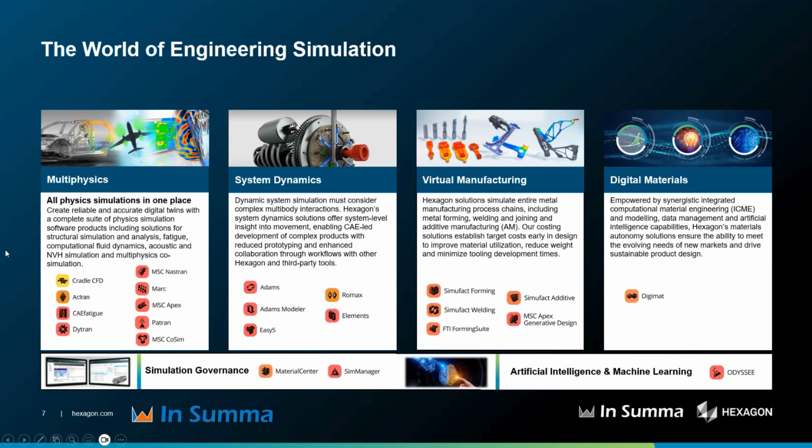As I mentioned, today we'll mainly focus on artificial intelligence and machine learning using ODYSSEE itself, but we'll still try to couple it with different kinds of simulation software. In this case, we'll look at Cradle CFD, and also from the system dynamics perspective, Adams.

So just to dive into the nitty-gritty, some of you have heard about this before, I assume, but some of you haven't. But what is ODYSSEE technically?

ODYSSEE is basically a tool specifically designed for engineers, mainly to help them in the design of experiment activities and also during their optimization activities. This is, of course, very broad - it can mean anything. The idea behind ODYSSEE is that it is very versatile and can be used in multiple engineering disciplines, not necessarily discipline bonded, but usable in whichever application you have.

Predictive techniques are utilized in ODYSSEE. What I mean by that is the machine learning algorithms use data sets to enable quick and easy data manipulation in order to obtain, for example, a new response for your design, or a new optimized case you are looking at. Hereby, engineers especially can avoid costly manual labor - if there is work where large amounts of data has to be generated, which takes a lot of time because you have to constantly change the parameters yourself, ODYSSEE can help do that automatically.

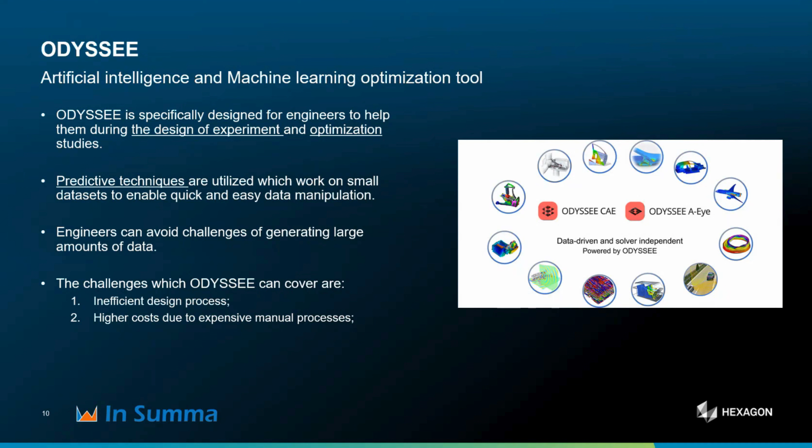First of all, we have ODYSSEE CAE. ODYSSEE CAE is basically a tool used for real-time predictions for a certain design space, so for design of experiments. This can, for example, help in multiple scenarios, which we will see later in the demonstration, whereby we have multiple variables which are somehow connected together, but still there's an optimization or an optimal setting to be found. Therefore, it can also be used for robustness studies, sensitivity analysis, and, for example, reliability analysis as well.

On another note, we have ODYSSEE A-Eye. ODYSSEE A-Eye is more focused technically on image-based prediction. So let's say if I have a data set of pictures and I know from those pictures what is wrong and what is right, I can import it into my learning database, and every new picture is predicted based on your learning database. But this is not only bonded to pictures - you can also use different CAD geometries, but also sound. The actual benefit of this is that it is very tailor-made, so you can create your own customized setup for that specific case you are working on.

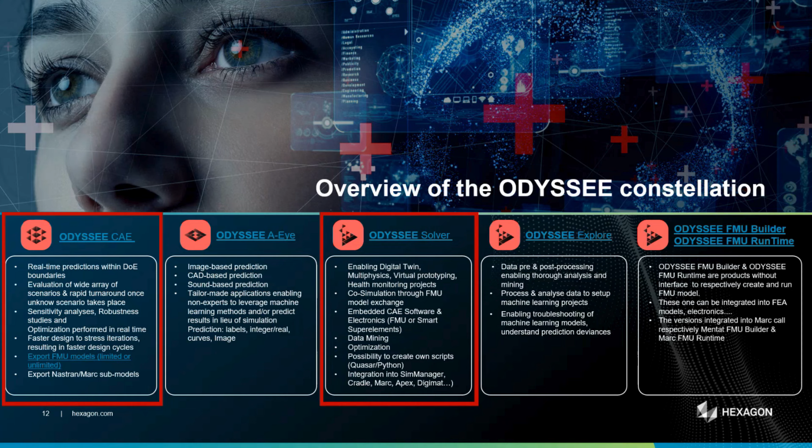In today's webinar, as you can see, this is quite broad, and we could go on all day talking about what can do what, showcasing a lot of case studies around it. But I would like to focus mainly on two particular applications: ODYSSEE CAE and ODYSSEE Solver. We are going to use ODYSSEE CAE for the Adams and ODYSSEE demonstration, and we're going to use ODYSSEE Solver, integrated into Cradle CFD, to tackle the problem that we then encounter.

In terms of reduced order modeling, which will be discussed later, some of you might have heard of this, some might not. On a brief introductory note, reduced order modeling, in its simplest form, starts from high fidelity complex mathematical models.

What that means is if I have a very complex model with a couple hundred degrees of freedom, and I want to use it for real-time applications, which is one of the benefits of reduced order models, I want to decrease the degrees of freedom such that the accuracy is still maintained, so it can represent the main trend line of my response. This is very advantageous, especially for real-time simulation, where you need a direct response from your model. It also makes it very usable for dynamic responses and dynamic analysis.

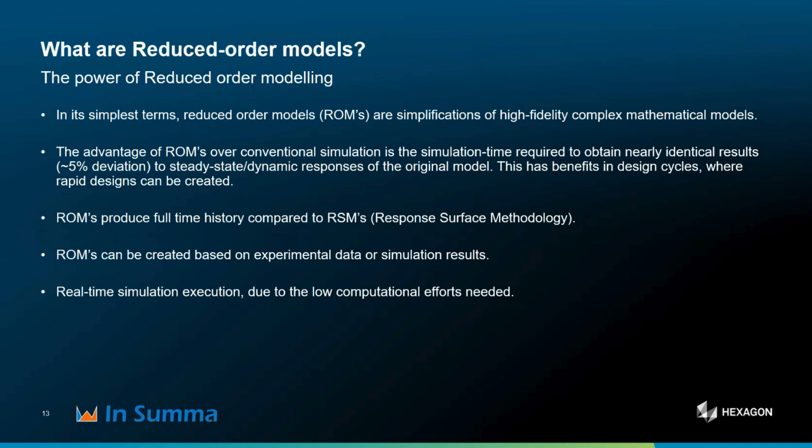Another advantage is that you can create this reduced order model based on either experimental results or simulation results. And because we have this reduced amount of degrees of freedom, there isn't a lot of computational effort needed.

If we compare it to a finite element simulation, a general engineering simulation, we see that reduced order models are data-driven rather than partial differential equation driven. If you have a finite element model, you have a stiffness matrix and a partial differential equation for each element. However, with a reduced order model, we basically have a certain amount of data points that we know.

So we have an X as our input, and a Y as our output. I have a data set, and what I want to do is predict the unknown. That's the whole idea - we predict the unknown in the shortest possible time, so we can be efficient with our work.

The power of ODYSSEE comes here, where we can use any kind of data set regardless of the source - it can be sound, a CAD model, or a response curve, which we'll see later. This helps create a relatively accurate model, within approximately 5% of your simulation results, while still managing to represent the accuracy - done in a fraction of the time.

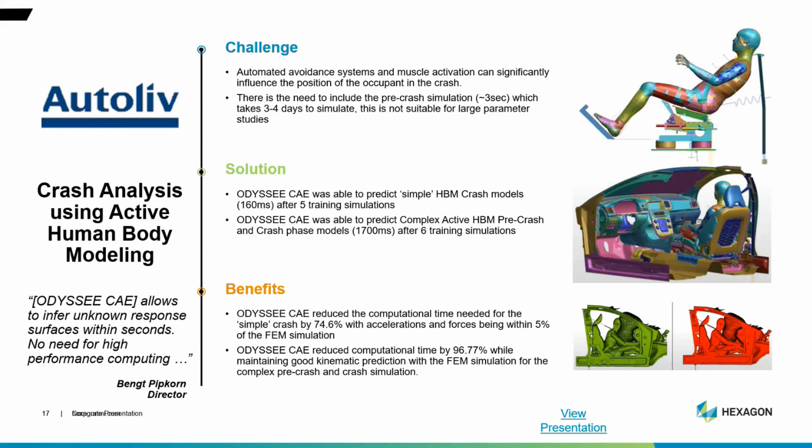So in terms of case studies, I want to provide 3 case studies for the audience today. And the first one, what I would like to focus on is a crash simulation from Autoliv. So the idea behind this is that they would like to predict different design specifications for their seat, and they need to do 2 different simulations. So one of them is a pre-crash simulation, which takes approximately 3 to 4 days to simulate if everything goes right, of course. And this is very, very time consuming.

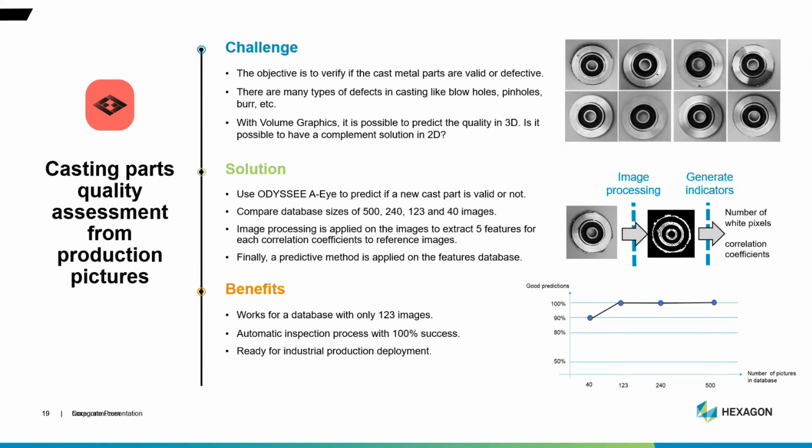Finally, this case study is from ODYSSEE A-Eye. The case study we have seen before is from ODYSSEE CAE. This is specifically from ODYSSEE A-Eye. And ODYSSEE A-Eye, as I mentioned before, is more an image-based prediction tool. So you can use, of course, different inputs such as sound, CAD models, and images as well. And the idea was basically here, if you have a manufacturing process, let's say, in this case, the manufacturing of brake discs, we can see on the top right that there are several pictures which show that the actual part itself is badly manufactured. So there's a manufacturing deficiency in the parts.

So the idea is basically that if I have a certain data set of pictures, in this case, the pictures of the brake caliper of the brake discs, we can then use that to learn via ODYSSEE A-Eye, basically to train a model, whereby we can then assign, okay, this brake disc is right, and the other one is wrong. And by that, you will be able to basically predict with every single new picture from your design process, or from your manufacturing process in this case, does it have a manufacturing deficiency or not?

But please note that you can always go all out, and you can always use a lot of pictures to train your database, but it's not always needed. As an engineer, especially from a CFD perspective, you can compare this to a mesh convergence study, let's say, whereby after some time, if I refine my mesh, the actual accuracy won't necessarily be higher, but my computational effort will still increase.

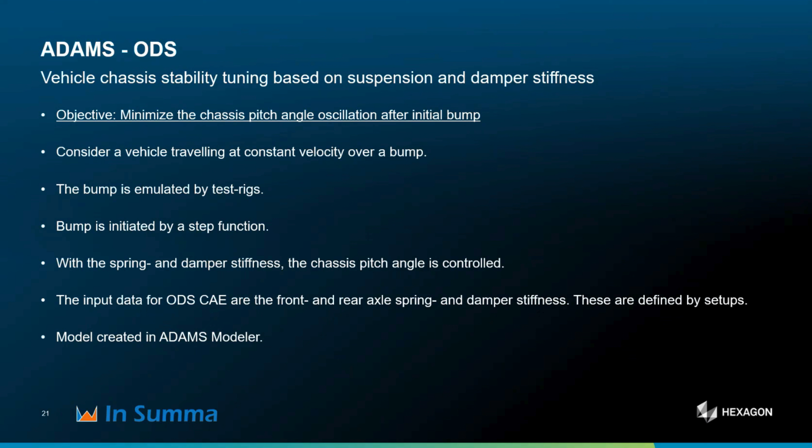So in this case, what we want to do is minimize the chassis pitch after an initial bump, because the idea is that we consider a vehicle traveling at a constant velocity, and it goes over a bump. This bump has been emulated by a test rig, which has been created in Adams Modeler, and the bump itself is induced as a step function.

But as I mentioned before, in order to fine-tune the chassis pitch, we need to use some kind of input, right? So the input in this case will be the front and rear spring and damper stiffness, and we will consider this as the axle stiffness. So what does that mean? That for the front axle, we have a certain amount of spring stiffness for one wheel. And that will then be changed in the Adams model itself.

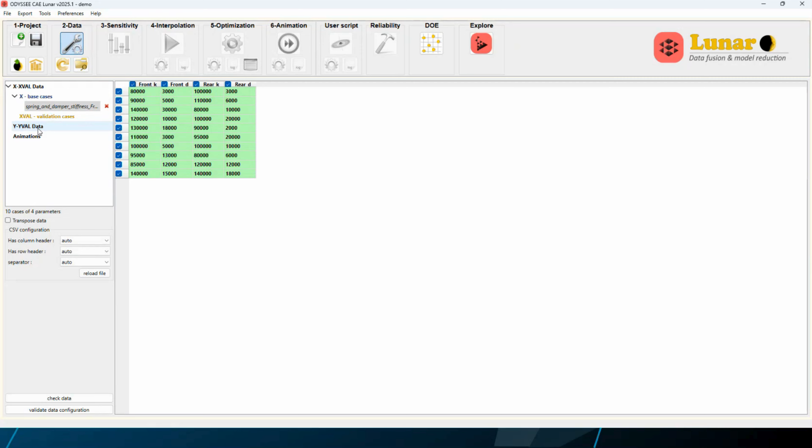On another note, we can also dive into what we need to do prior to actually receiving some response curves. We have to specify our Y data, which is our output, and this is also done via a CSV file. If we click on import data from CSV, we can see that this is once again already prepared. Here we have the 10 different response curves for the 10 different suspension setups. If we click on open, we can already see the amount of data points.

However, it is very important to note that in ODYSSEE CAE, the amount of cases you have for your Y data and the amount of cases you have for your X data need to match. And you can see that the setup of this CSV file is technically incorrect. It should be 10 cases of 401 points. And we can fix that directly.

So if you have a wrong CSV file which is not working, or is wrongly set up because of the format, you can directly transpose it and it will change from 401 cases to 10 cases. Now we have a matching pair: 10 cases for both the X and the Y data, with 401 points, which are the actual data points for the response curves. You can click on check data, and by the check mark it is verified, so there are no errors with the data itself.

Then we can click on validate data configuration, and there is a warning saying everything will be deleted, in case you already had some files regarding it. After clicking OK, more icons will open up, and we get into the ODYSSEE CAE GUI. So this is what we can see.

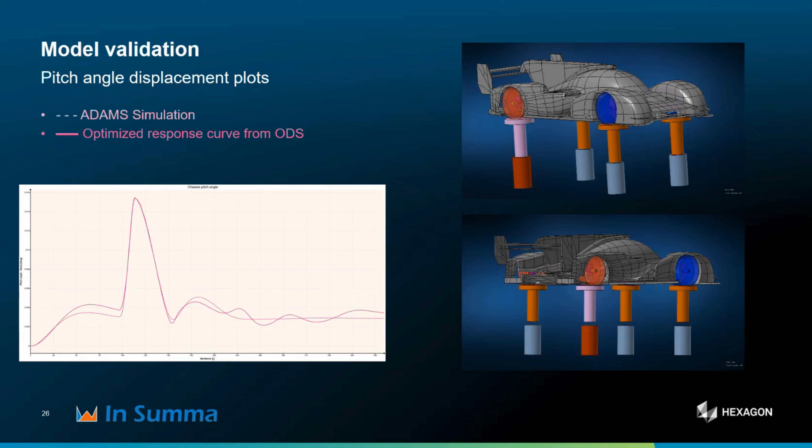The reason for this is because, as you have seen, some of the response curves had quite high amplitudes towards the end of the iteration as well, as in the chassis was still unstable. But we didn't have a lot of response curves in that specific domain where the oscillations were negligible or zero. So in this case, ODYSSEE can still predict relatively accurately the actual trend line, which oscillates around a mean.

But in order to get an exact solution, you would then still have to add some data points in this case. So let's say if you increase it to 15 data points with the new DOE that we have just created, you can remove those oscillations completely, whereby, of course, with the new DOE, you would then be closer to a flatter curve.

On the final demonstration, what I would like to do is present to you how to create a reduced order model using ODYSSEE again, but this time we are going to use Cradle CFD for a heat transfer case. In this case, we have a PCB in a so-called chassis, whereby a CPU is located on it, and both the CPU and PCB emit

heat. And we have a fan velocity at the end, which we will see later, which is extracting all the air from the system. This is basically a closed system. The idea is that we would like to use reduced order modeling to simulate different scenarios within a couple of seconds.

Here also, as before with the Adams case, we need 10 different simulations first to actually create our reduced order model. But of course, if you have experiments, you can use those as well. The actual model itself has been created in Cradle.

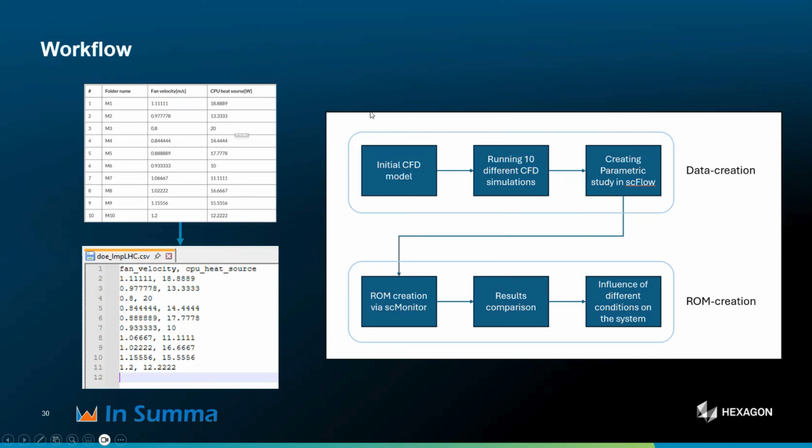The actual workflow is a little bit different because in Cradle CFD, you have the opportunity to already create parametric studies. This has been pre-created for the sake of time. Here we can see the different settings which will be used: the fan velocity and the CPU heat source, which will be changing for our reduced order model. This has also been moved into a design of experiment in the CSV file, which we can see below.

So as before with Adams, we have an initial CFD model, we have 10 different simulations, and we have created this parametric study in SCFlow alone. Then what we will do now is create the reduced order model from scMonitor itself. Then we can take a look at the actual results and look at the influence of the different scenarios.

So to start, let's dive into the demo. We have scMonitor opened here. Normally this is not directly available. You would have to open this up via options, configuration, going to workflow and enabling workflow settings.

By that, this window will appear, and you can click on it, and a new window appears where, as I mentioned before, you can create a parametric study from scratch. This starts from one CFD model, and you create 10 different ones. Or, what we are going to do now, create a 3D reduced order model. So we click on Create 3D ROM, keep everything checked, click on Next, and finish.

A new window appears where, just like before with ODYSSEE CAE, we specify our base calculation path, which will be here at SCFlow. This is where all the simulations are located, from M1 to M10. If we go to select folder, we keep the calculation folder base name, where all the simulation results from SCFlow are located, so all the field files and log files.

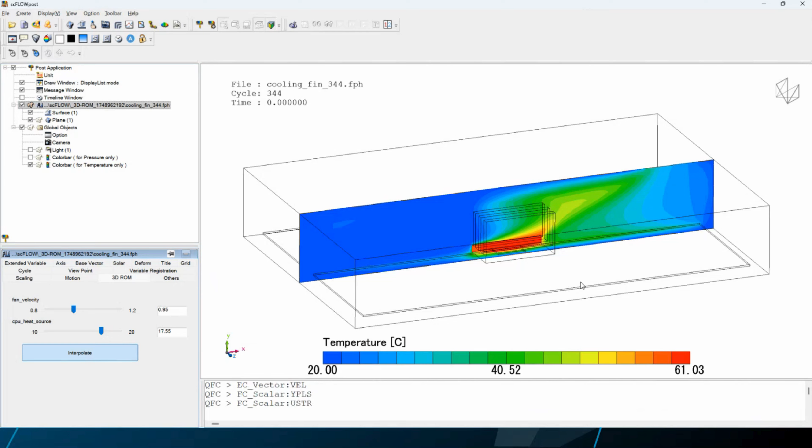But if I select these ones and click on interpolate, it will interpolate automatically, and you can see a change in the actual temperature field, because we used different boundary conditions for this case.

The same can be done if I decrease to 0.8 and keep this to 18, and click on interpolate, then this will happen again. Just for illustration, you can see the temperature field has changed, especially at the back and the beginning of the flow field.

But still, this costs me a fraction of the time, while if you run this CFD simulation standalone, it can take up to a couple of hours if you use a low amount of cores.

So just to conclude, what did we learn today? First of all, ODYSSEE is basically a data-driven design and engineering optimization tool, which helps the engineer overcome more intense manual labor — it helps with automation. ODYSSEE itself consists of multiple applications, such as ODYSSEE A-Eye, as mentioned before, for image recognition, and ODYSSEE CAE for reliability and DOE analysis. ODYSSEE is technically very multi-purpose, so it's very versatile.